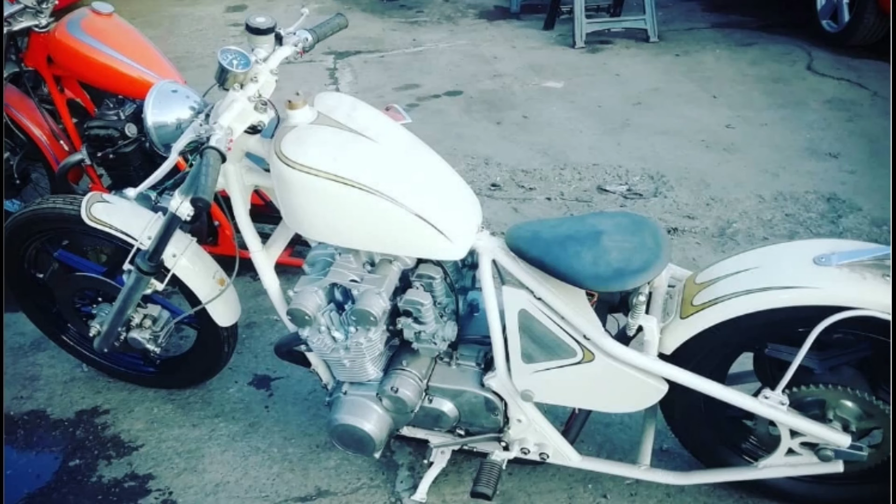How do I build a motorcycle frame seems to be a fairly common question for search engines. Obviously you'll need quite a wide skill set, but once you know the mechanics of it, that still presents the problem of how do you apply those skills. Again, this would seem to be a fairly common problem, as another favorite question for search engines is, where can I get plans for a frame?

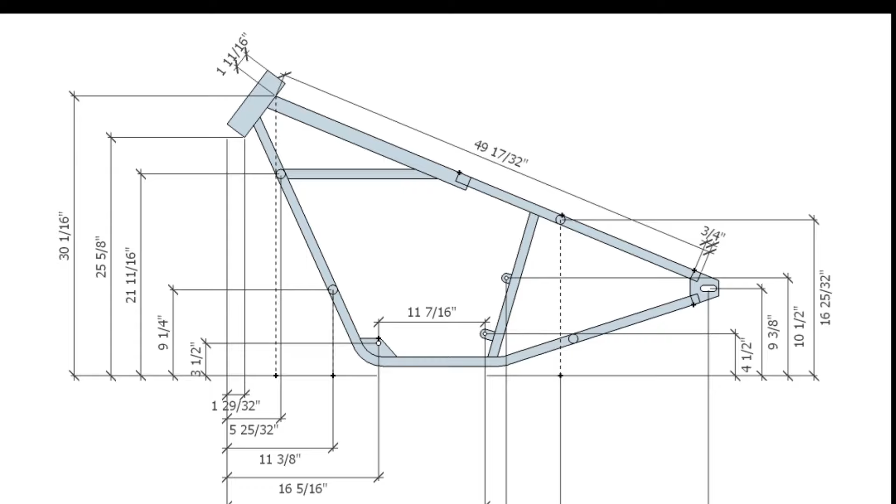Traditionally you got plans for a frame by making the frame, measuring it, and then transferring those measurements to a drawing. These days the expectation is that everything can be designed on a computer, but the reality is that real-world vagaries and variations mean that the input is unreliable and the lovingly detailed and dimensioned drawing is often useless.

This three-part series is intended as a guide to how I go about arriving at a physical frame that looks the way I want it to look. It does nothing to guarantee the structural integrity of the frame. I'm sure there are other ways, but this is the method I came up with and use. The three parts are going to be how it looks, how it works, and how to avoid killing anyone.

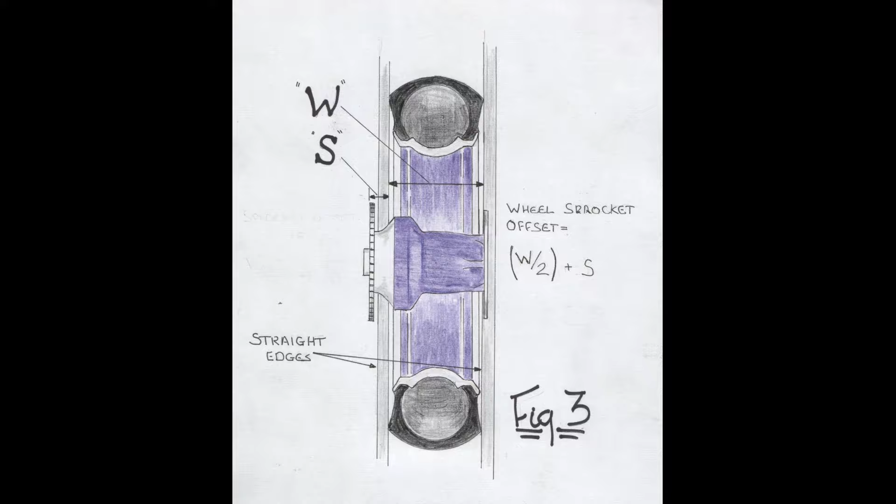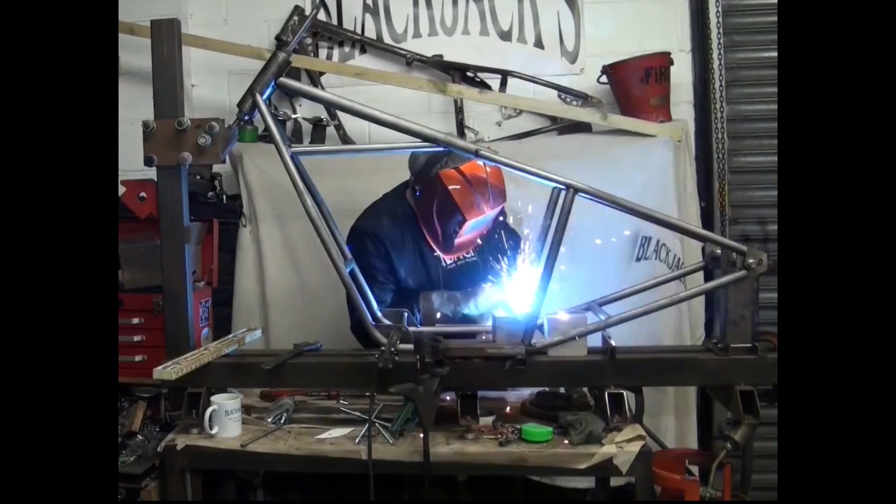This is part 1, and it's about how I make it look how I want it to look, without using any plans, and for the sake of simplicity, for now, I'm only going to look at rigid frames and pretend that rear suspension hasn't been invented. To build a motorcycle frame you need to be able to weld, able to fabricate sheet and plate steel, able to bend tube and able to machine parts.

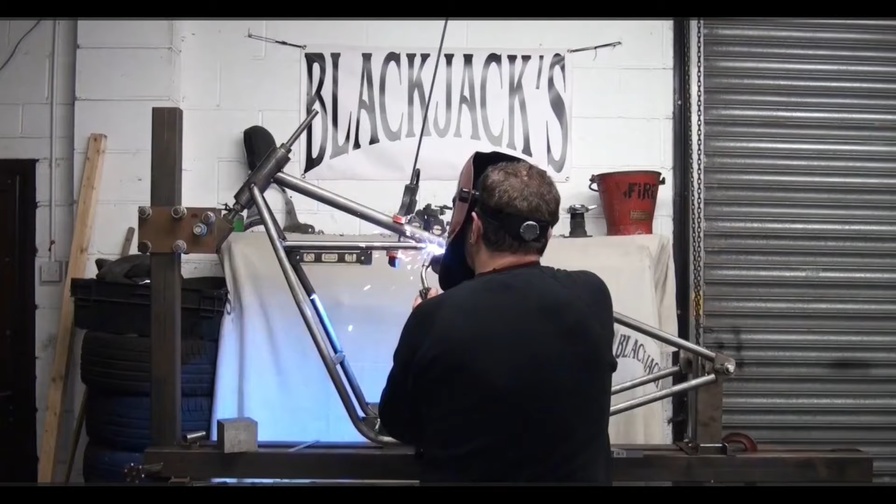MIG welding is fine as long as you don't use flux core or gasless wire, as it presents too much opportunity for inclusions and hence weld failures. Use proper wire and proper gas. On the other hand, despite what you may have heard, TIG welding is not a magic wand. If you're welding two tubes with 1/8 of an inch wall thickness together and you have lovely looking 1/16 of an inch wide weld bead, you haven't got full penetration and it's almost certain to fall apart.

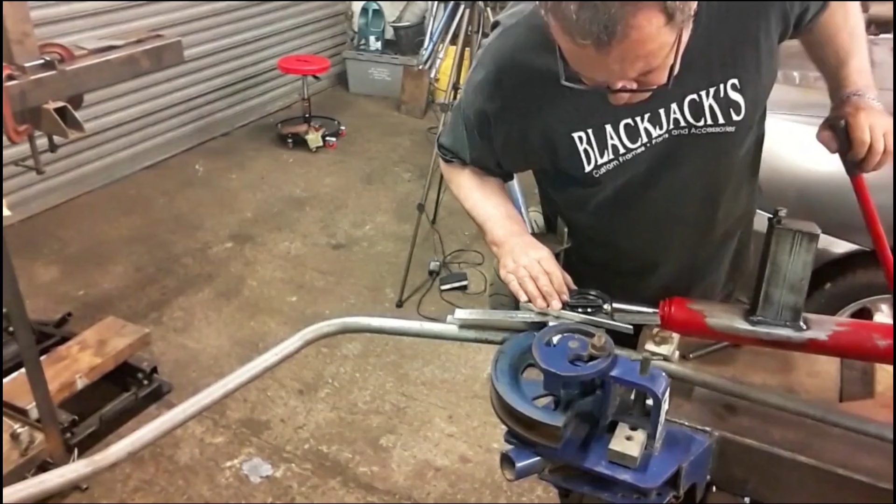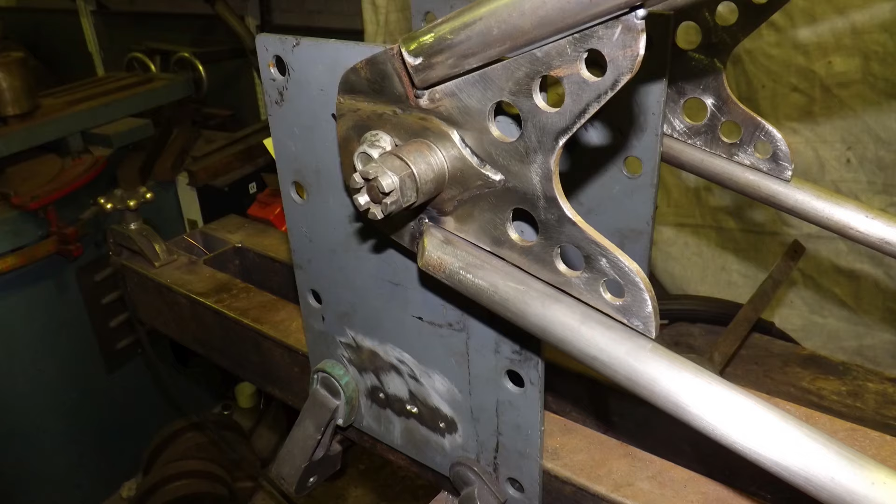Bending tube will require a tube bender, and that's an actual tube bender, not a hydraulic pipe kinker from Harbor Freight, Machine Mart or other national tool emporium of choice. It will also require some tube, and as a rule of thumb the tube should be the same material specification as whatever your national motorsport body prescribes for roll cages, and it definitely should not be water pipe. Sheet or plate fabrication isn't rocket science, especially if you have a pair of straight leg calipers. The mill scale needs to come off if you use hot rolled.

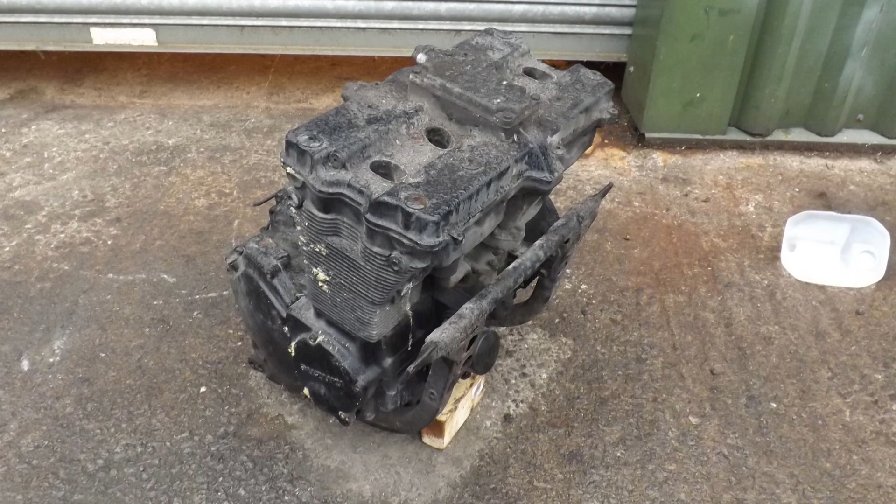In essence, a motorcycle frame is a bracket that you attach some forks, wheels, and an engine to. Having the forks, wheels and engine you intend to attach to the bracket means the bracket can be designed to fit them, which makes far more sense than making a bracket and randomly searching for parts that fit it. It also ensures that the parts will work together.

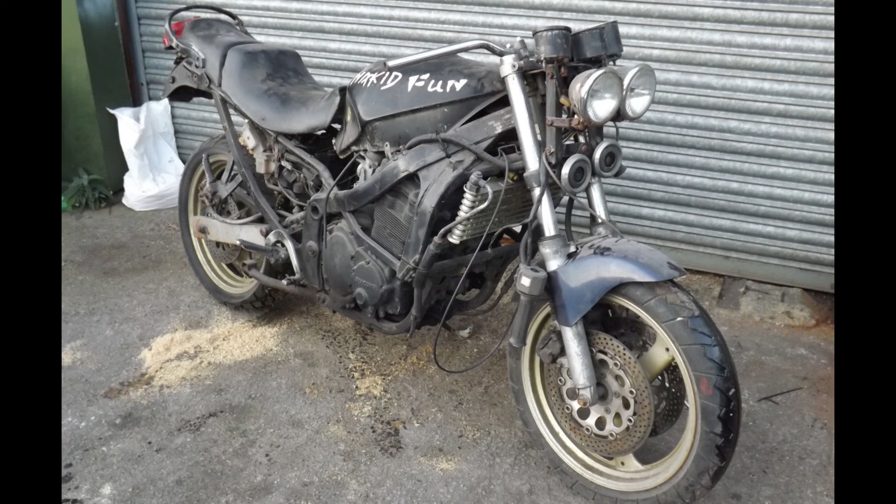If you use a steel-framed motorcycle as a parts donor, then usually most of the bits that need machining can be stolen off of the donor. If you're intending on riding the finished article, then a running donor with functioning brakes is a good idea, as if you start buying stuff like brakes and electrics as bits and pieces, it adds up really quickly. Take a look around. Buying used parts and assembling them into a motorcycle isn't a popular business model for a reason.

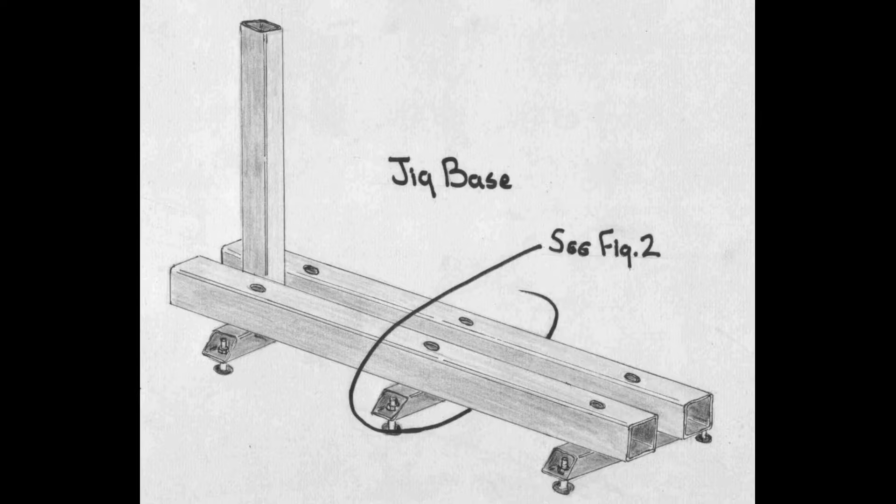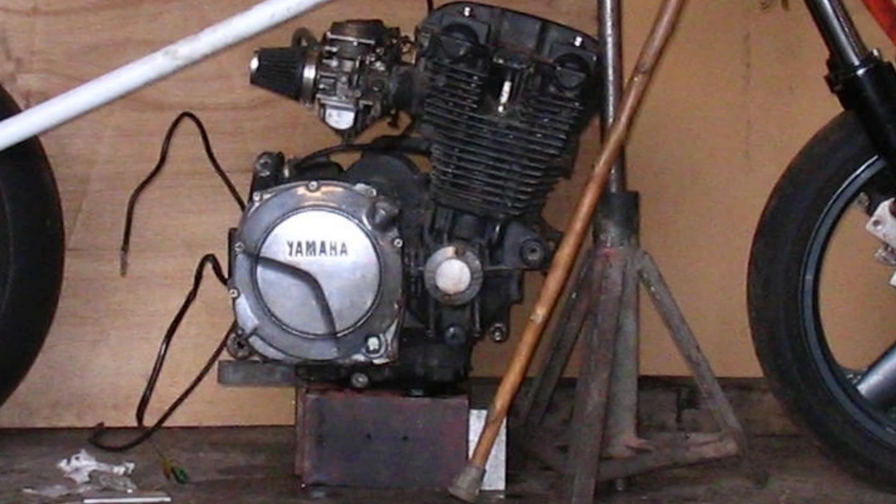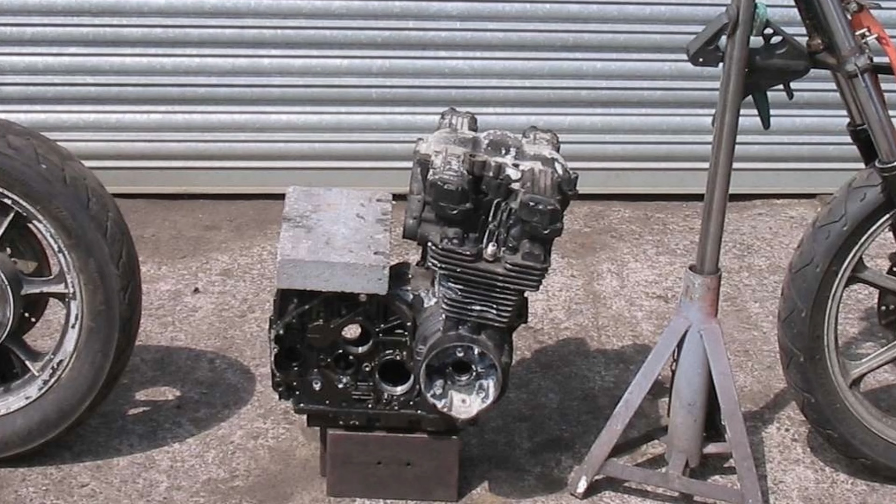I have a video on how I built my frame jig, and basically this section is about how I get the measurements to set the jig up to build the frame I want. At this point I have the engine with the carbs, the forks assembled with the front wheel, and the rear wheel and axle. Design decision number 1 is ground clearance. Typically I use somewhere around 5 inches under the engine sump. Local curb heights, potholes, and where exactly the exhausts are going to go are more important than the desire to look cool with a stupidly low motorcycle, because there's nothing cool about getting beached on a speed hump.

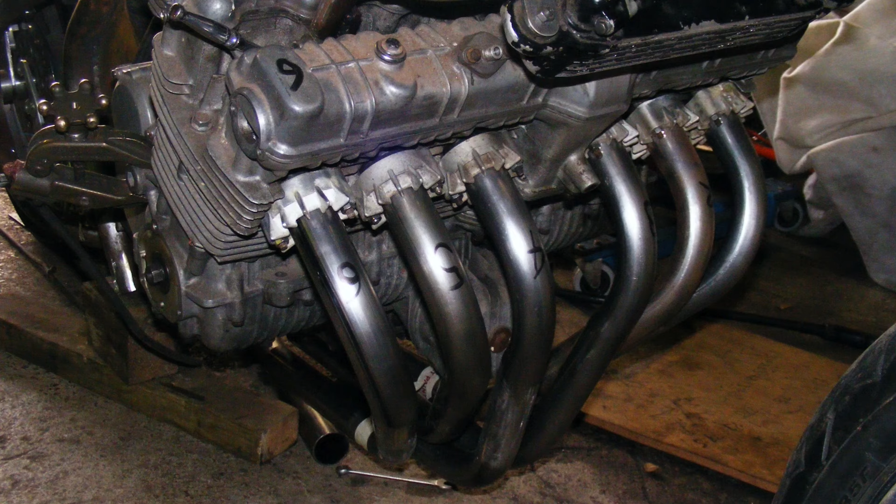This is often a topic of debate, and on the occasions when people haven't listened and have come back and complained, then, told you so, is about all that I have to say on the subject. It's important to bear in mind that the wider everything gets, the sooner it sticks into the ground when you lean the motorcycle into a bend.

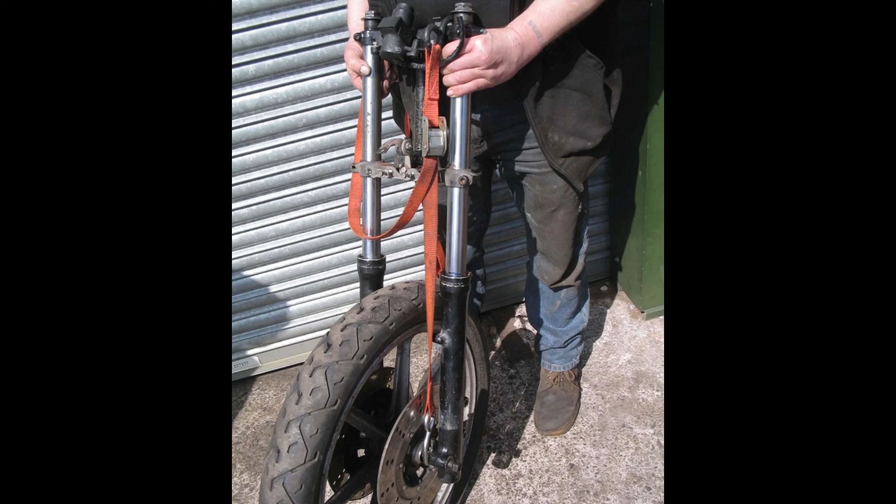Bearing all that in mind, I set the engine up on a wooden block at the required height and then chock it up so it sits level. The next bit, setting the forks up, is a little tricky as they want to run away and they should be set at ride height. For the majority of forks on normal motorcycles, the ride height is about 1 inch off of fully extended. So looping a ratchet strap through the wheel and around the bottom yoke or tree lets me squeeze the forks down by the necessary 1 inch and stops them from rolling around.

At this point I use a jack or axle stand along with a length of timber to prop the forks with a G-clamp on the timber and position them in front of the engine. The axle gets pushed through the rear wheel so that the axle will lean on another axle stand and the wheel gets placed behind the engine. At this point I can visualize the frame when I'm looking at the arrangement of parts in space.

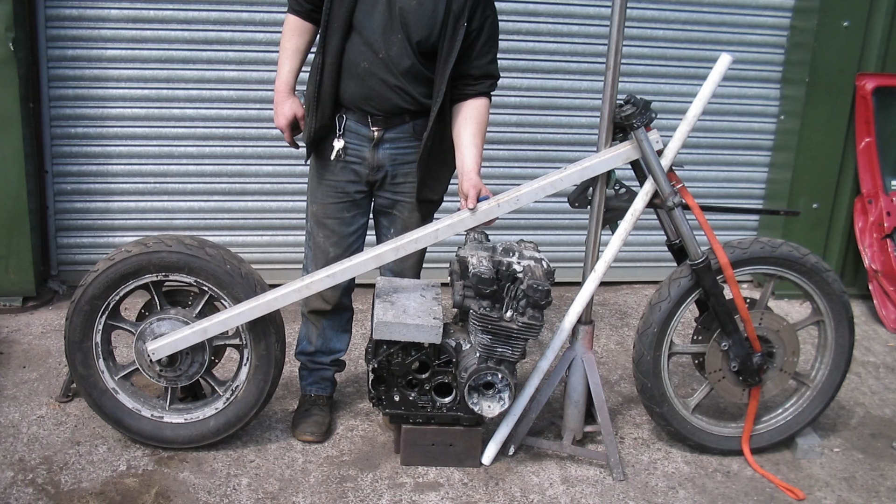I usually grab an assistant and use a straight edge to gauge the line from the top of the steering head to the rear axle. Make sure that will leave room for the throttle cable or cables, the gas tank tap is going to clear, there's going to be enough room for the forks to turn lock to lock without hitting the gas tank, and anything else that looks problematic.

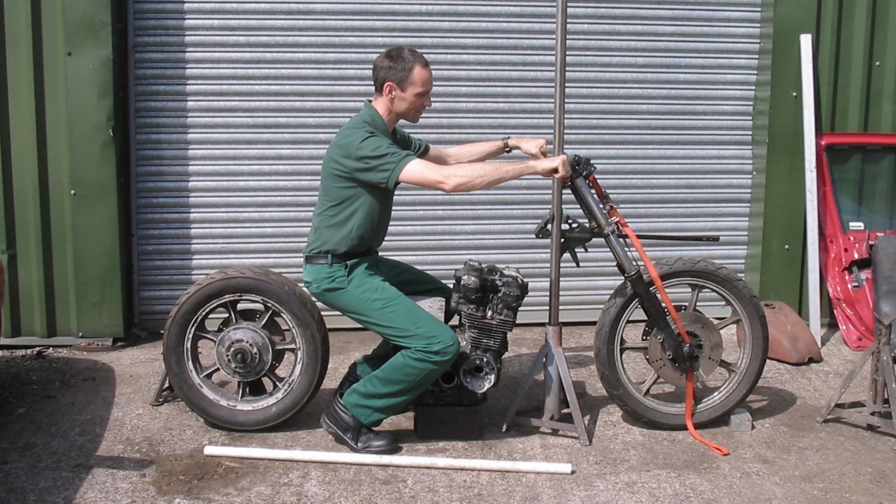I also try and get some pics of the intended rider standing over the arrangement, and sitting on a stool or block at around the ride height based on what the straight edge from steering head to rear axle suggests might be the seat rail height. I'll mess about with things until I'm happy that that is what I'm looking for and nothing untoward is going on in the way of clearances. It's surprising what a difference moving something by as little as 1/4 of an inch can make.

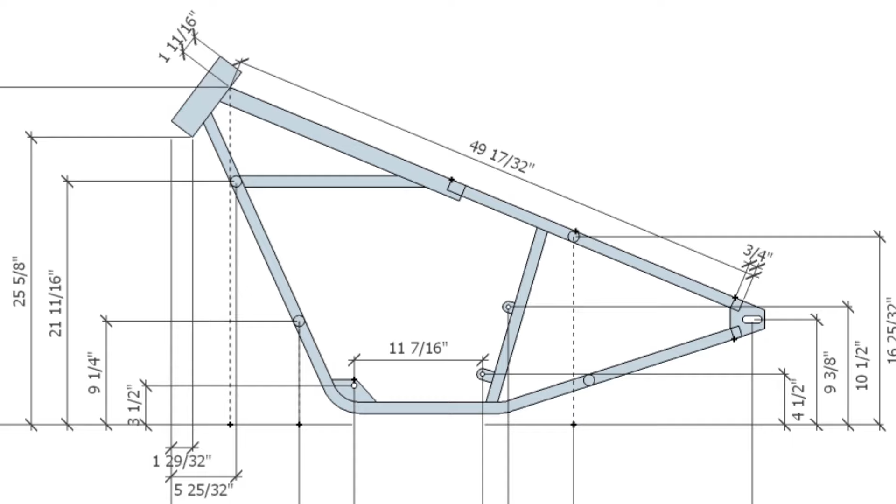In one of the CB750 chopper frame videos, I redrew the plan and added measurements from a nominal bottom plane and a vertical plane set 1 inch ahead of the front lower corner of the steering head to set things on the jig. This time the approach involves taking some measurements off of the mock-up. Firstly, I make a visual check that everything is square with everything else and symmetrical around a center line, paying close attention to the forks being vertical viewed from the front. This is important because, as I said earlier, as little as 1/4 of an inch can make a difference, and I'm about to measure my mock-up to get the information I need to set the jig up.

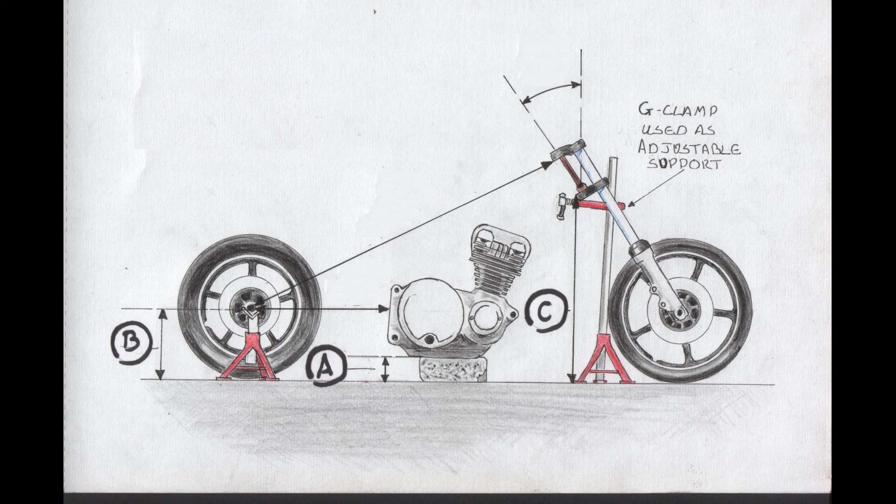I already know the ground clearance under the engine, so that's dimension A. Dimension B is the axle height above ground. I measure this both sides of the wheel as a check that the wheel is upright. Dimension C is the height to the top of the back of the lower triple tree, as that tells me where the rear lower edge of the steering head will sit. Where possible, I measure this with the headstock fitted to the forks. Dimension D is the angle the steering head is sitting at, usually measured from the vertical, but not always.

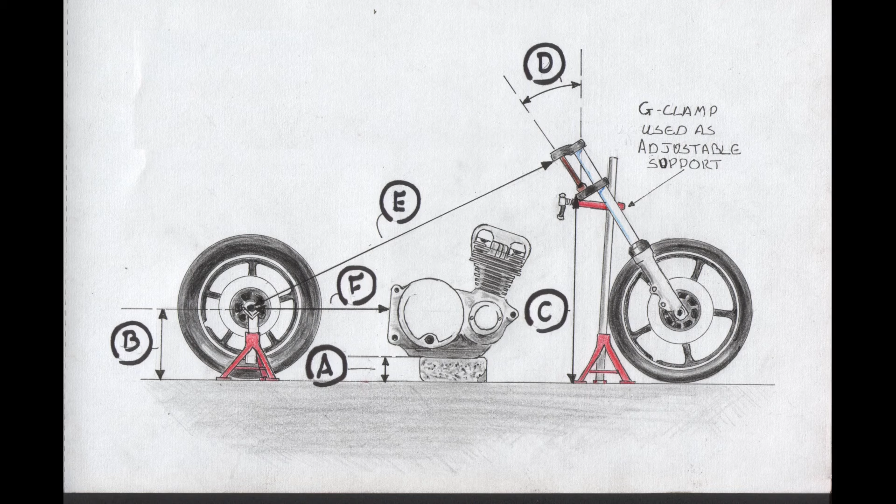Dimension E is the distance from the top of the steering head to the axle, and dimension F is the distance from the axle to the center of the engine sprocket. And that's all it needs to capture the look of the frame I want to build to fit the parts I'm using. Just 6 dimensions. The difference between this and working from plans for the CB750 frame is that the measurements are relative to each other and not Cartesian coordinates. Having tidied everything away, I get the jig up on a table and level it left to right, and front to rear.

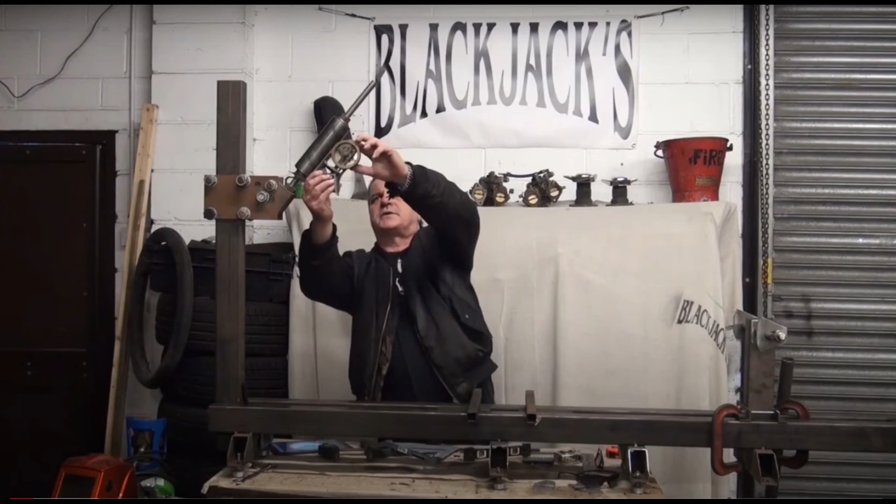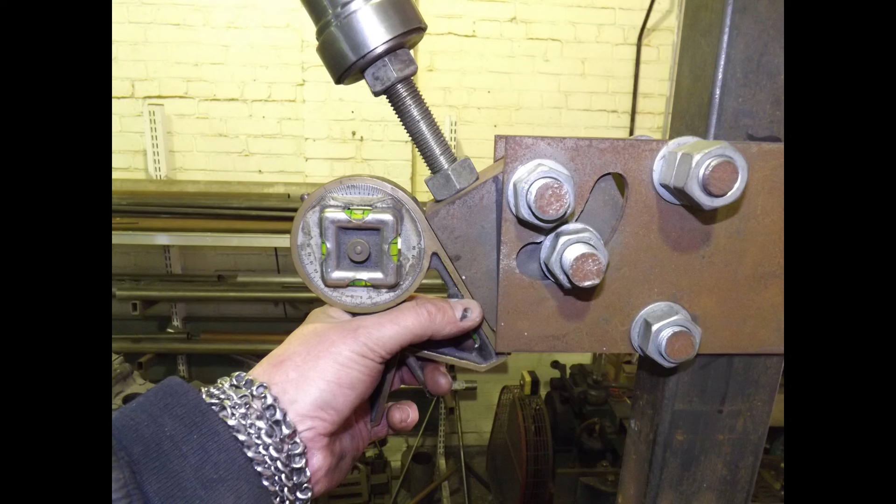After that, it's time for the steering head to go on the jig, so the steering head stick is adjusted to match dimension D, and in my case, dummy bearings machined to the bearing size for the steering head on the outside and to the size of the steering head stick on the inside. I prefer dummy bearings to cones, as the bearing seat isn't always central to the steering head and cones can sit on the part that isn't concentric.

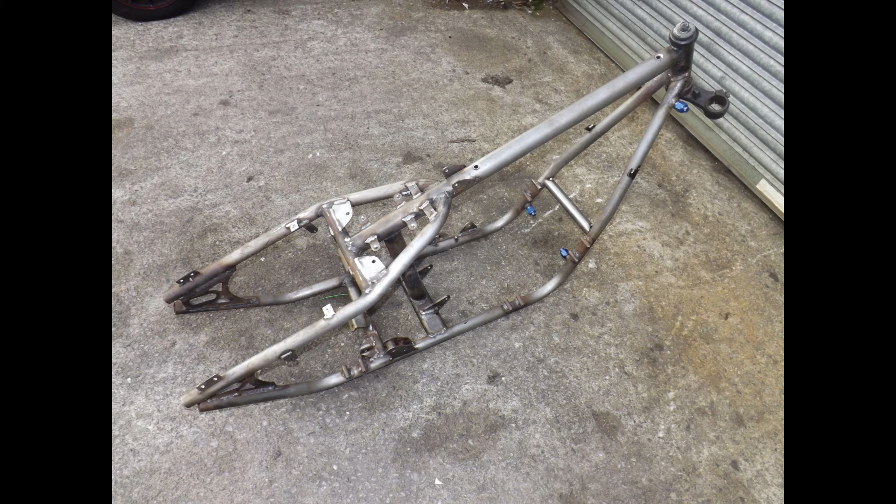A donor motorcycle with a steel frame will usually have a steering head that can be cut off of the frame and cleaned up, a notable exception being the CB750, which has a steering head made up from pressings. In some instances, the frame number can be used along with the original documentation as the identity of the new frame. The laws on this will vary from country to country, and indeed with the age of the donor within a given country. Check your local laws and learn the difference between a VIN and a frame number, as in many cases they are legally distinct things and it pays to know which law you're breaking or not breaking.

For the CB750 frame, I fiddled the steering head up and down the steering head stick to get a specific distance from the jig upright, but it's not necessary to do that here, as all the dimensions are self-referencing as opposed to using the upright of the jig as a reference. With the steering head stick set to the correct angle, the next thing I do is refer to dimension C.

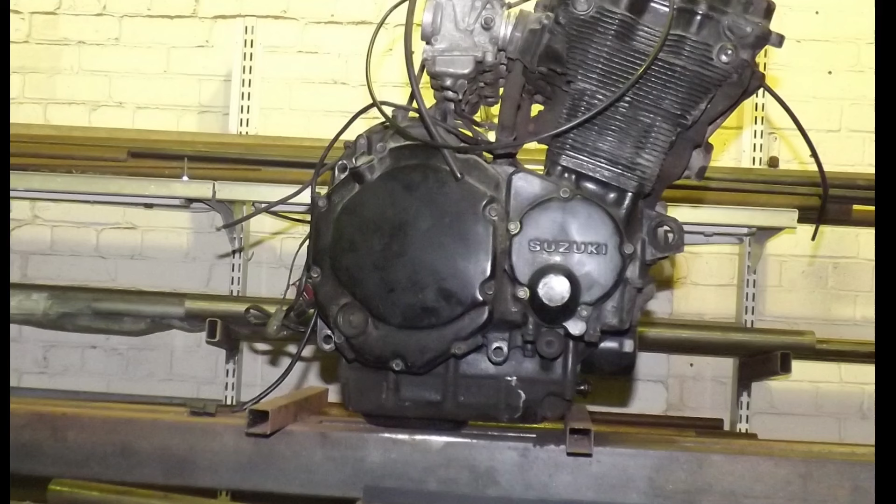I'm going to be setting the engine on some 1-inch square box section on the jig top surface, as having it wobbling around 5 and a bit inches above the jig isn't helpful, so I deduct the inch from dimension A, and obviously if I was using 1 1/4 inch box section under the engine or 30 mm box, then I would deduct that amount from A. Dimension A, minus the thickness of the box section support under the engine, becomes dimension H for height, as it tells me how much heights from the mock-up are reduced by to get the height over the jig.

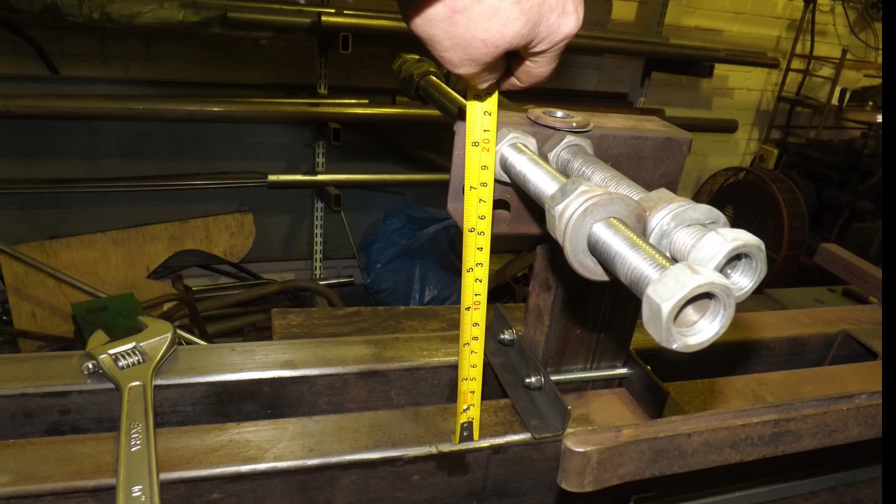Dimension C, the height of the steering head, gets dimension H deducted from it, and the rear lower corner of the steering head is set to that distance above the face of the jig. The next step is to set the axle plate holder at dimension B minus dimension H above the face of the jig. For now, I pay no attention to the distance the axle plates are separated by, I'm just concerned with setting the height of the front of the axle slot above the jig.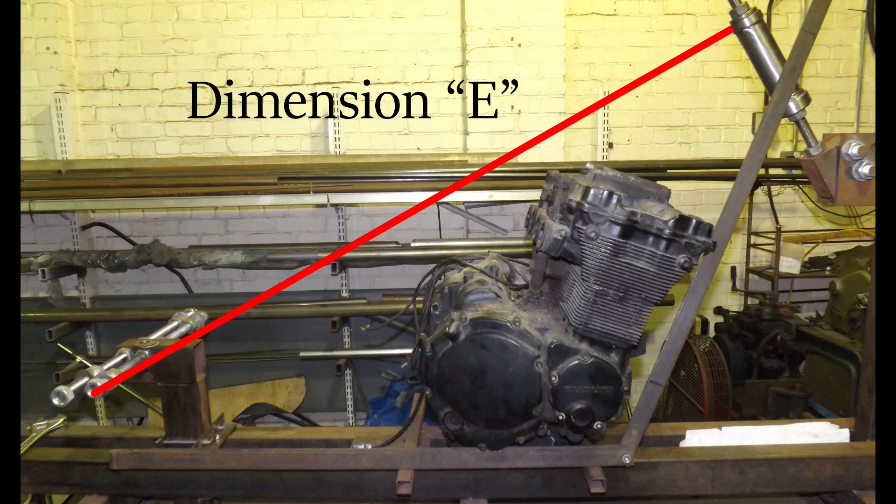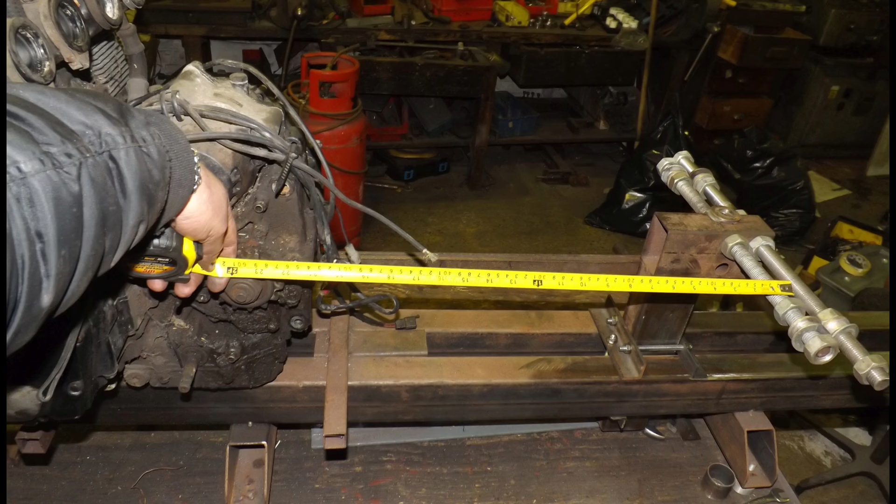Once I've set that to B minus H, I consult my notes and slide the axle plate fitting along the jig until the measurement from the top of the steering head to the center of the slot fixture is equal to dimension E from the original parts mock-up. Finally, I set the motor on the jig and slide it back and forth until the center of the front sprocket is F units from the center of the front pin of the axle plate fixture.

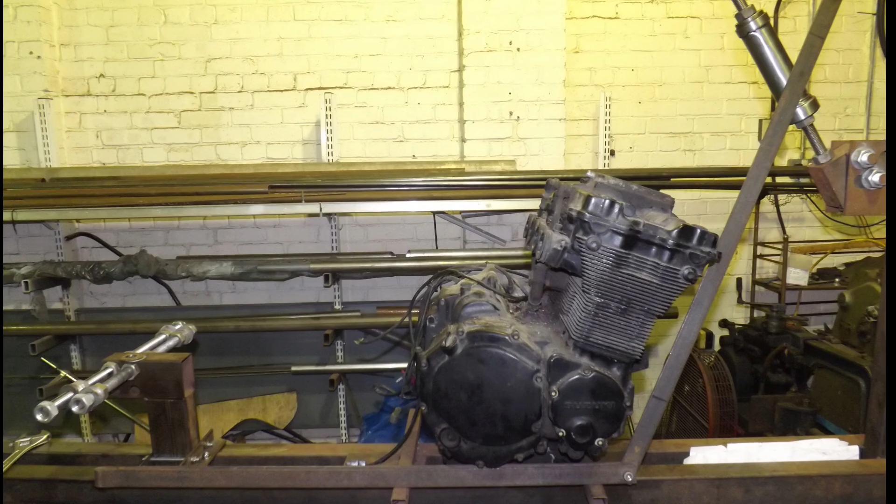At this point, if we call the bed of the jig the X-axis and the upright at the front of the jig the Y-axis, then all the important points are now located on those axes. It's possible to record this information and create a profile plan of the frame I'm building. The problem is that this isn't going to make a viable plan, as there's the Z-axis to consider, which is left to right across the jig.

The steering head will be sitting in the correct position on the center line of the jig. What remains is to establish the Z-axis measurements for the engine and the axle plates, because as things stand this isn't going to make a viable frame, let alone a drawing. In the next video, I'll describe how to do that.